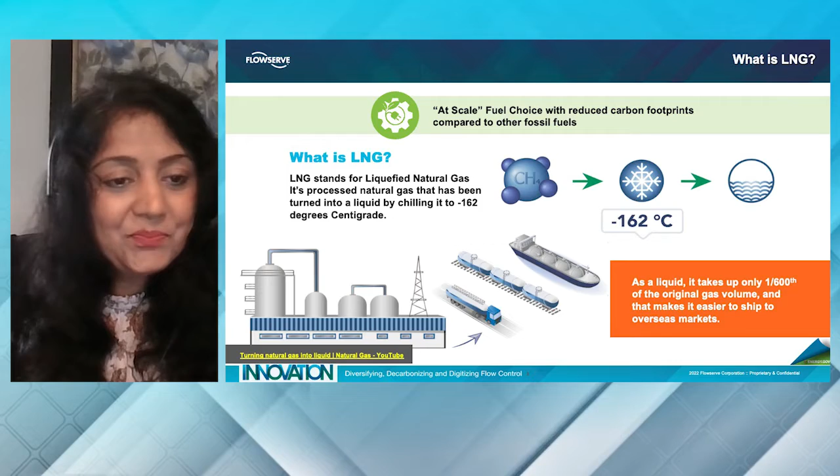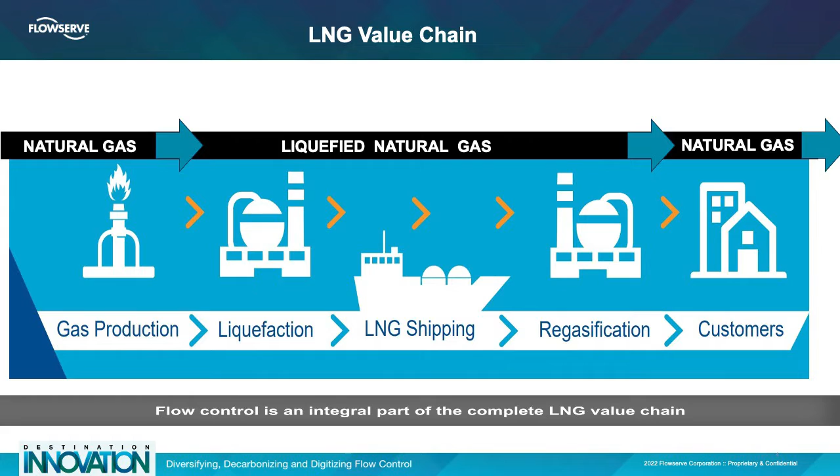The LNG value chain, as you can see, is generally described as having four components: gas exploration and production, liquefaction, shipping, and regasification, which further comprises storage and distribution. These components fit into the gas midstream segment.

The primary method of transporting gas over long distances is to use a pipeline. There are several factors, however, that can impede the method, and they could be technical, political, or economical. When gas cannot be transported via pipeline, utilizing LNG becomes the obvious choice.

In a nutshell, the LNG industry focuses on liquefying natural gas at cryogenic temperatures to reduce its volume so that it can be shipped in dedicated vessels and then regasified at the destination. Once back in the gaseous state, it is injected into the pipeline network of gas distribution and made available to the end users and customers.

These four segments of the LNG value chain involve comprehensive process unit operations. Hence, effective flow control becomes an integral part of the entire value chain and plays a vital role at all the stages of the journey, from the extraction of the gas to its liquefaction, transportation, regasification, and distribution.

Optimized flow controls can support safety and emissions reduction within the LNG industry. It can help the customers with superior efficiency advantage and energy optimization, therefore improving the overall reliability of the unit operations and reducing the operating cost of the LNG liquefaction and regasification facilities.

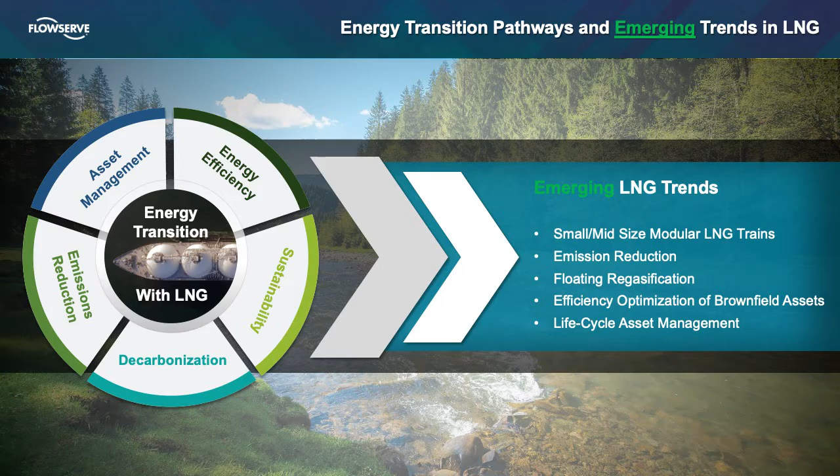But to capture the growth potential of LNG in an increasingly competitive market, most companies and developers need to shift how they conduct business, particularly by being early adopters of emerging trends supporting the energy transition pathways. The good news is the LNG industry has been agile in embracing these emerging trends and technologies, which can further help them reduce the carbon footprint within their processes.

I can talk for hours on these emerging trends, but in essence of time, I would like to briefly touch upon and highlight the top 5 trends. First, the industry's pivot towards small and mid-sized modular LNG trains compared to conventional mega LNG trains. This has been one of the emerging trends as it supports less risk to the investors and competitive price per ton of LNG produced in an optimum timeline, and of course less regulatory hurdles to cross compared to the mega train formats.

Second is emissions reduction by digitization. Data analytics, network devices, sensors, and other digital technologies are changing how LNG is produced and consumed across the economy.

Numerous advantages can be gained by embracing digitization of critical valves, pumps, and cryogenic equipment, but main among them are reductions in emissions and carbon footprint, improvement to cost, safety, and efficiency.

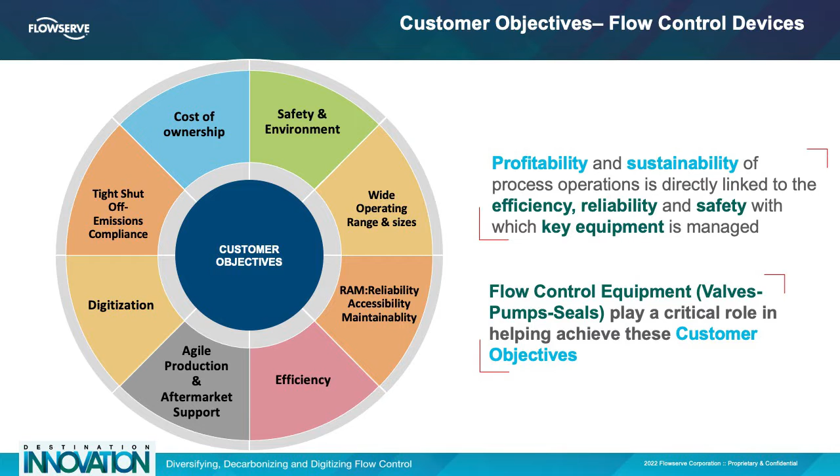Now, I would like to pivot to address more specific industry trends when it comes to flow control devices within the LNG applications. Understanding these trends will be very significant to meet the customer objectives. LNG applications can be very challenging, with cryogenic and extreme temperatures combining to create a nightmare for typical flow control devices. The LNG life cycle deals primarily with methane, which is potentially a major source of greenhouse gas emissions.

Since methane is 25 times more harmful than CO2 on a pound-to-pound basis, there is an increasing emphasis on minimizing methane emissions using technologies that minimize or eliminate fugitive emissions and leakages from the flow control devices. In such a scenario, the customer or LNG developer's objective mainly revolves around tight shut-off flow devices to ensure emissions compliance.

Once the LNG facility is up and running, loss of production for a single day due to downtimes can cost millions of dollars. Hence, a superior reliability, accessibility, and maintainability of flow control devices to reduce the operational downtime and loss of production goes a long way.

Wide operating ranges of flow control devices to accommodate the cryogenic and non-cryogenic conditions that the LNG life cycle sees, along with the phase changes in the various stages from gas to liquid and back to gas, also becomes an important objective for customers. Agility in production and manufacturing of these flow control devices and efficient aftermarket support are other important customer objectives to being able to accommodate the changing market demands and dynamics.

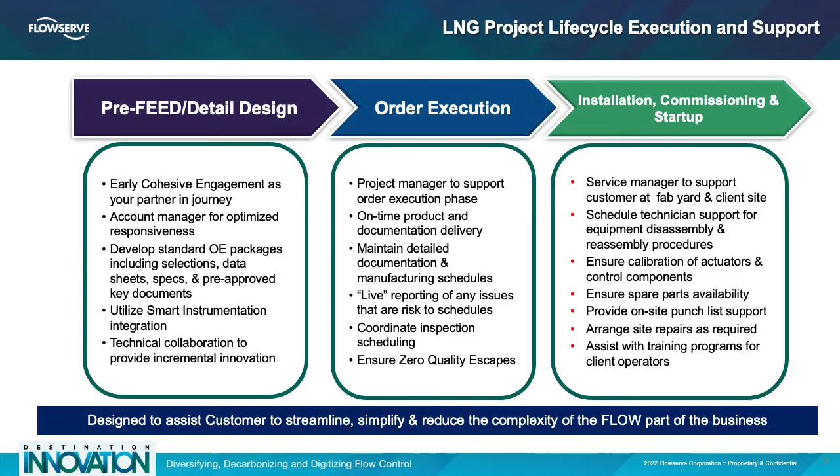Now, given the complexity of the baseload LNG development, project lifecycle execution and support from the flow control OEMs, or for that matter, from any critical equipment suppliers becomes very significant and helps the customer to meet the stringent execution timelines and on-time completion of commissioning and startup phases.

Cohesive engagement with the EPCC contractors from the early pre-FEED engineering phases helps to seal the precise design requirements and develop the key documents. The continued collaboration during the order execution phases helps to overcome any schedule risk and on-time equipment delivery with zero quality escapes. Being the customer or EPCC contractor's partner during the installation and commissioning phase ensures timely factory acceptance tests and superior training programs for client operators.

Conclusively, as a flow control OEM, assisting customers streamline, simplify, and reduce the complexity of the flow part of the business is an important parameter contributing to the success of baseload LNG project development.

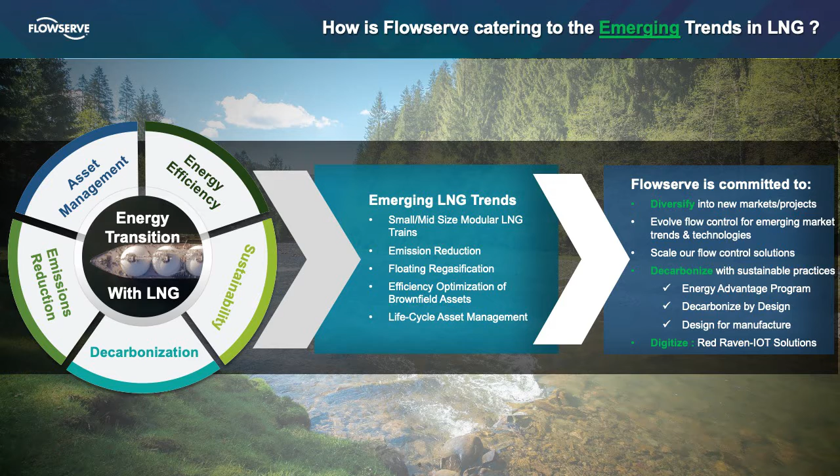Now, with all the above customer objectives at the focal point, Flowserve has been at the forefront to meet the emerging trends within the LNG value chain. Adopting the 3D strategy around diversify, decarbonize, and digitize has further helped Flowserve to cater to these emerging trends. We are diversifying within the small, mid-size modular LNG and floating regasification segment by evolving the technology and design of our products to make them fit for purpose.

Emissions reduction and life cycle asset management of LNG facilities, which has become very significant with energy transition gaining momentum, is being addressed by our strong digitization and IoT offerings through Red Raven. We are at the forefront of efficiency optimization and decarbonization of brownfield oil and gas assets by leveraging sustainable practices and introducing programs like Energy Advantage, Decarbonize by Design, and implementing design for manufacture principles to reduce the total cost of ownership for our customers.

Understanding of the emerging trends within LNG to produce carbon neutral LNG is, of course, an admirable goal, but it can be overwhelming at the same time. But I believe with our thoughtful initiatives and well laid out program focused on energy efficiency improvement and product innovations, we are well equipped to address the needs today. Beyond these initiatives, Flowserve's Global QRC, Quick Response Center network, has been equipped with capabilities to ensure operational excellence of customers at the facility as a top priority.

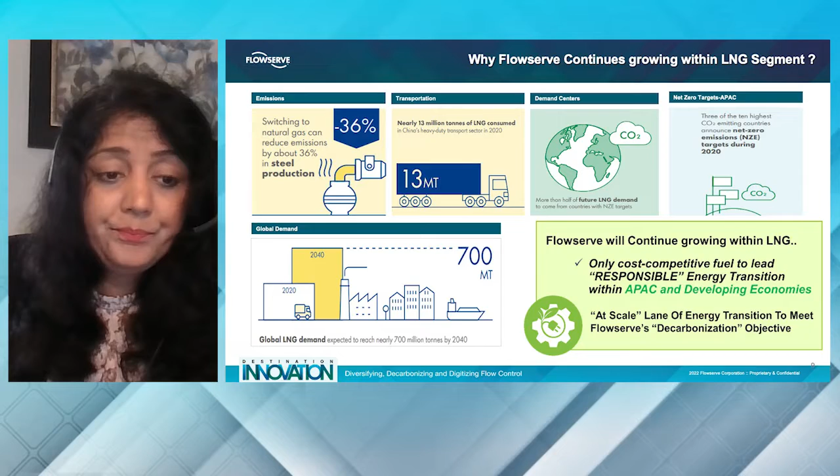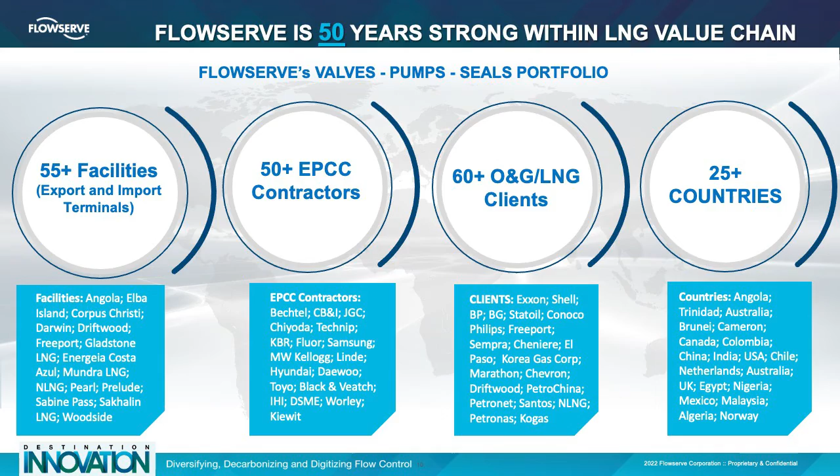I would like to conclude my talk with this final slide that reflects our strength within the LNG value chain. We are 50 years strong, servicing the sector with our valves, pumps, and seals portfolio, with more than 230 years of flow control experience. We have provided valves, inclusive of general service and severe service, the pumps, seals, to 55 plus facilities around the world, from Freeport LNG, Cameron LNG, Sabine Pass within North America, to Mundra regasification terminal in India, Sakhalin in Russia, Angola LNG, and Prelude in Australia. We have global footprint on major LNG and regasification projects.

And with the strong presence within the LNG value chain, we understand the pain points of our customer, and at the same time, pay due attention to the lessons learned from our existing install base. We thrive in continually evolving our products, portfolio, and services to meet the customer's objective and the emerging market trends within LNG, to be their most cohesive and collaborative partner during the project development phase, aftermarket services, as well as lifecycle asset management.

I would like to reiterate that in the face of energy transition, LNG has so far been a strong enabler, and it will continue to be a significant transitional fuel as we move forward on the path of carbon neutrality to meet the larger goals of the Paris Agreement and COP26. But there is much work to be done, and industry collaboration will be the top priority to unlock the potential of LNG as a sustainable, cost-effective, and resilient energy source for a cleaner energy mix within the US as well as across the globe. With a robust customer-centric business model and equipped with the 3Ds, Flowserve will continue to lead the way within the LNG value chain and other emerging technology space.